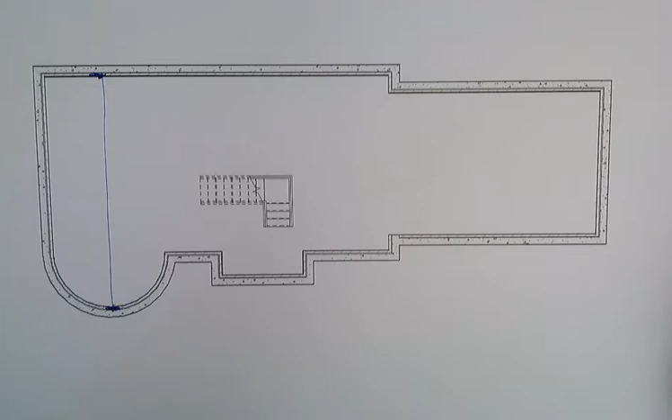So the longest point of our building, the longest span—and whenever we talk about how long a joist spans, we're really talking about the distance that it supports the floor without any support underneath it. Right now our span would be from that point to that point, which ends up being about 25 feet long.

We could find a joist that would span 25 feet, but the problem is you'd end up having a bouncy joist. That's a very long span to have in a residential situation. You'd have to have a very tall joist, probably ending up being 16 inches high, and you'd have to space it at 12 inches on center. You'd spend a lot of money on the floor.

So what we're going to do, more likely than not, is have a beam that will go down somewhere near the center of this joist. I'm going to draw the beam in red, and I'm not going to put the beam right through the stairs here—obviously I can't have a beam through the stairs.

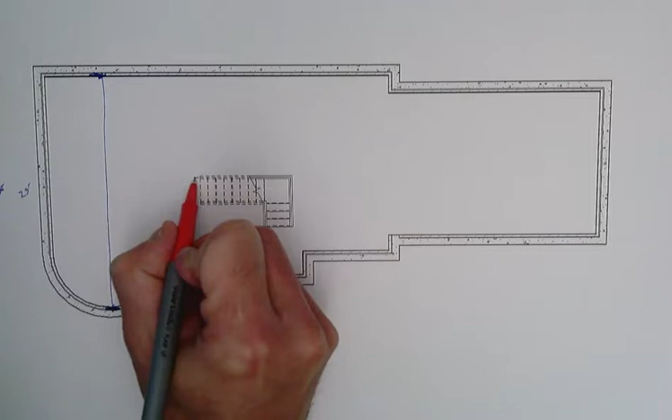I'm not going to put it on this side either, because then I'd have a beam right there. So what I'm going to do is line the beam up with the stairs and carry that through the whole way. Now I have a beam in place and I know where I can run my joists.

So my joists the whole way across are going to run this direction, and then down here they're going to run this direction. If this is 25 feet across, this distance is probably about 16, 17, 18 feet, but you could and actually should measure from this point to this point to find out how big of a joist you need and what the spacing will be.

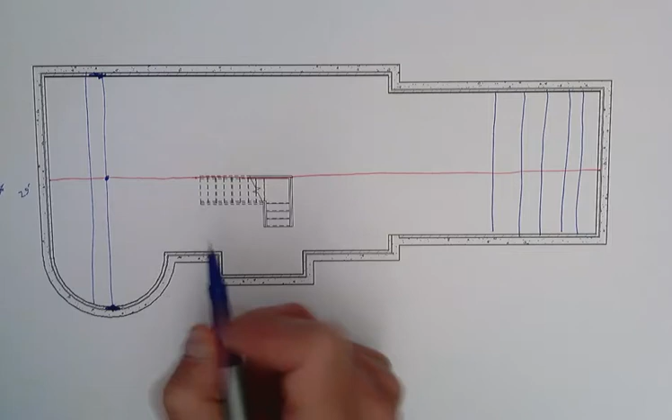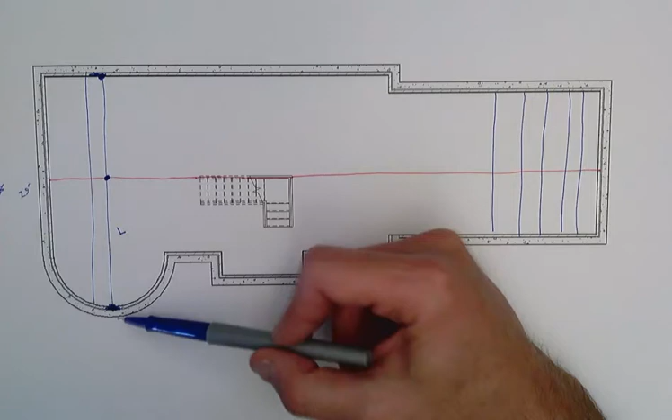After you do that, you can choose your joist. Keep in mind that now you have a support at this point, a support at this point, and a support at that point—I just created a new span. They always use the letter L to signify the span, and this is going to be a multi-span joist instead of a simple span joist.

So when we look at our joist selection printout, we can start narrowing it down to using a multiple span. The next thing I'd want to do is get my joist selection guide out and find a measurement. After measuring, we found that the new span—the distance the joist is unsupported—is 15 feet 7 inches.

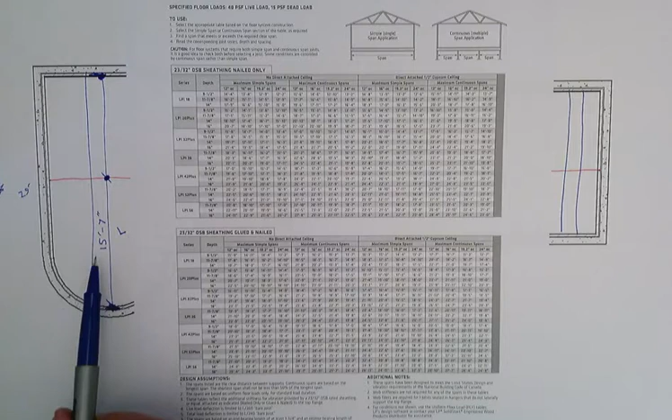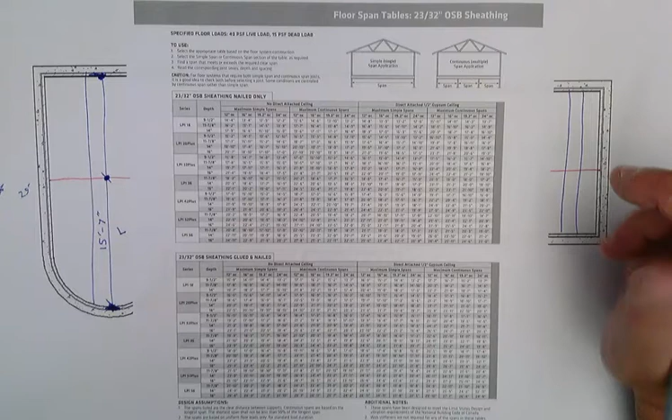So now we can go into our joist selection sheet. These are Louisiana Pacific wood I-joists, and there's quite a few to choose from, but the one we chose is for 23/32-inch OSB sheathing—that's how thick the subfloor is going to be. We also chose to use specified floor loads of 40 PSF live load and 10 PSF dead load, which are pretty substantial loads, so we're definitely good as far as picking out something that can handle any floor we put in there.

We could have a pool table in there, large bathtubs, things of that nature.

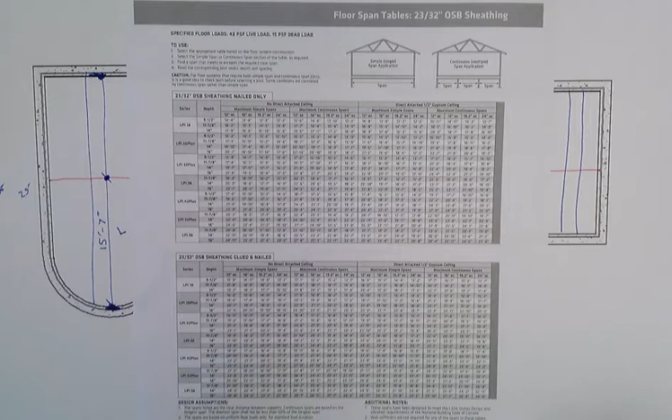So the first thing we want to do with this chart is figure out which option we're going to use. The first two options we have to look at are OSB sheathing nailed only, and OSB sheathing glued and nailed.

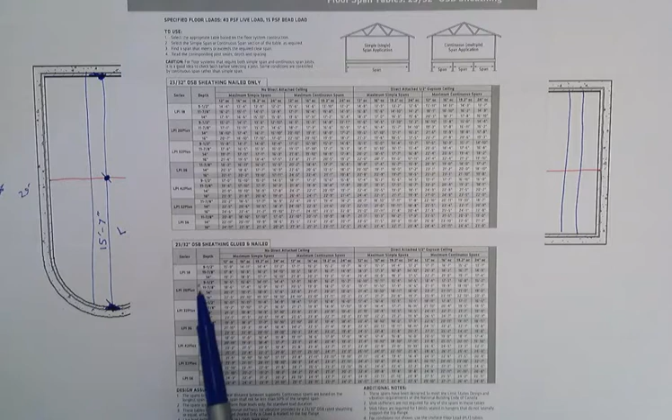The big difference between the two is obviously one is glued and one is nailed. Whenever we glue the subfloor to the joist, it becomes one solid sheet instead of a bunch of individual sheets. So we're going to go ahead and glue our flooring to the joist.

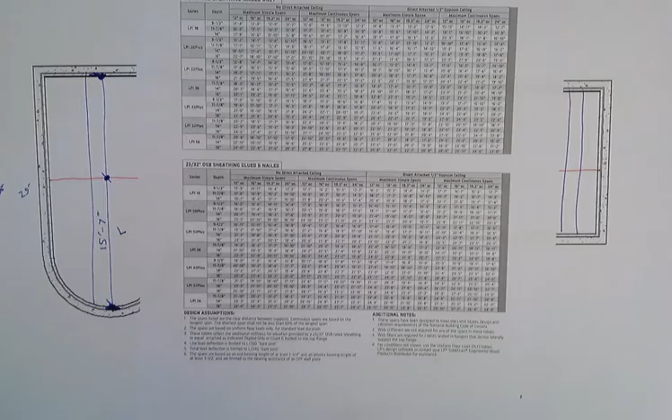Once we've narrowed it down to gluing, the next thing we have to decide is whether we're going to use no direct attach ceiling, or direct attach ceiling with 1/2 inch gypsum.

The big difference is, if I'm going to attach drywall directly to the underside of the joist, they only have the ability to deflect or bend a certain amount, because if they start bending too much, it's going to crack the drywall.

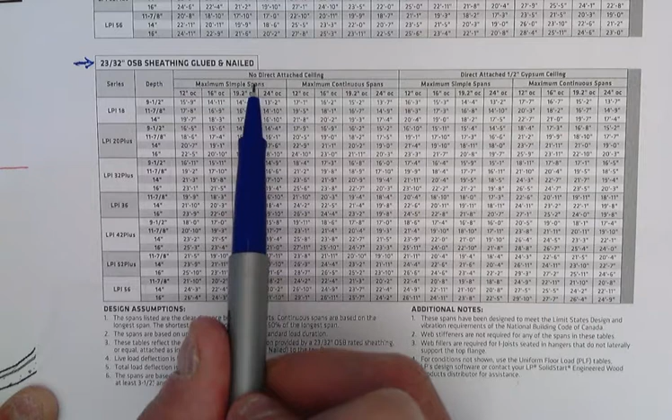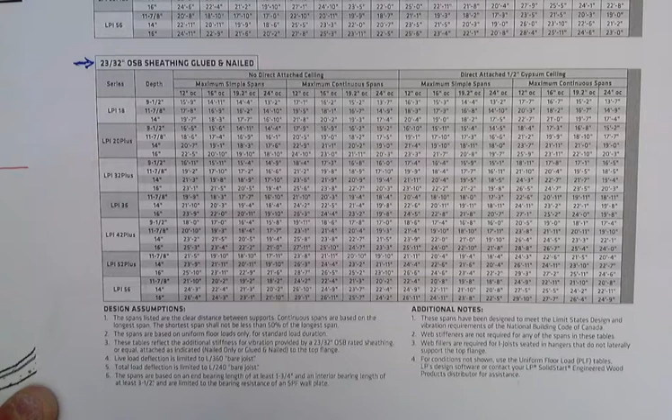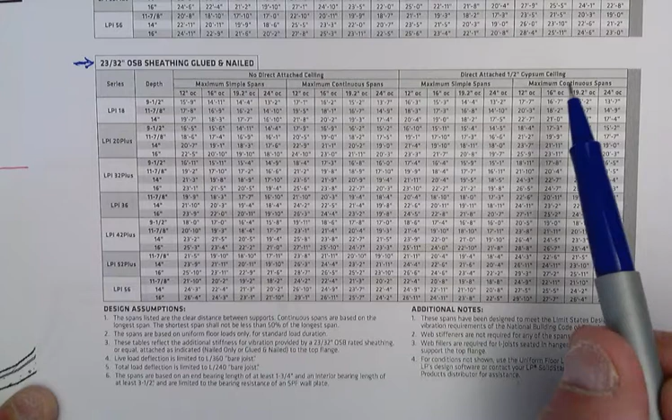In the other situation, the no direct attached ceiling, they're talking about a drop ceiling or an acoustical ceiling grid where the joists aren't connected directly to the ceiling. So we're going to use the worst case scenario and imagine that the people we're designing this for might want to put in a drywall ceiling in their basement. Now we can start looking at this chart.

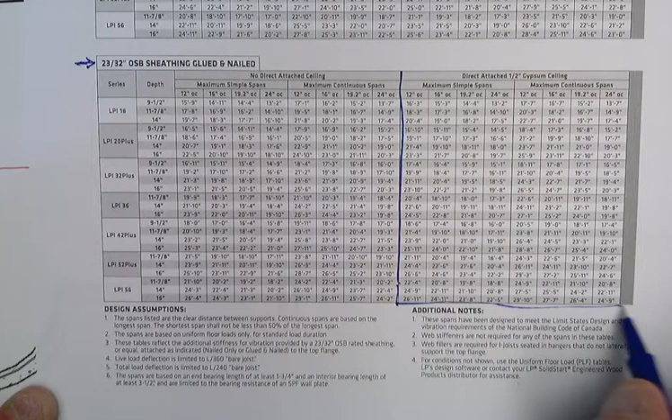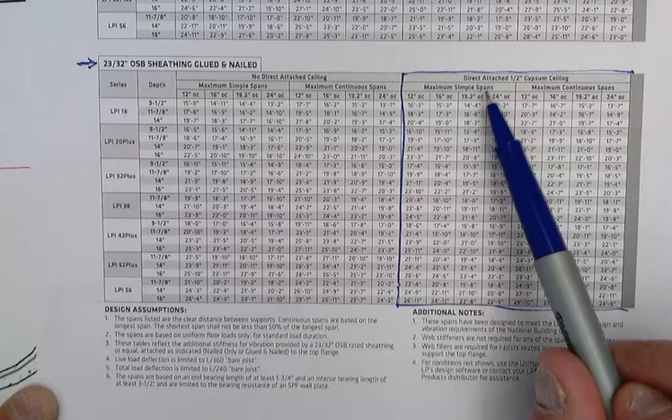So we're getting narrowed down, and the next thing we have to look at is maximum simple span or maximum continuous span. The difference is the continuous span has a support in the middle, while the simple span only has support at the ends.

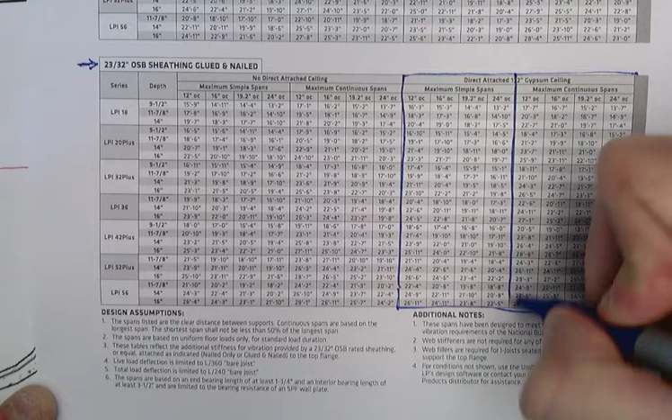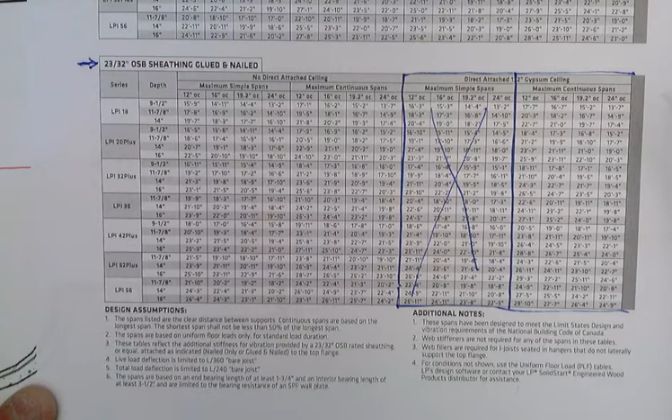So now we can look at the section on the right. The next thing we have to look at is our spacing. We have four different spacing options: 12 inches on center, 16, 19.2, and 24.

12 inches is going to make us spend a lot of money on joists—we'd have a lot of joists, and we could use that, but we're going to try to avoid it. 24 inches, in my opinion, is just spaced too far apart, so we're going to avoid that too. Now we are narrowed down to the multi-span category.

So the next thing we're going to do is narrow it down from multi-span. We're going to eliminate the 12-inch on center and the 24-inch on center, and look at the Joist Series. The series we're looking at right now is LPI 18.

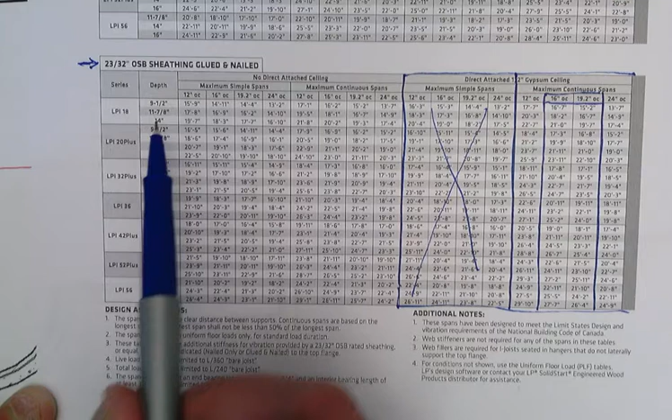Basically, as we go further down the list, the joists become more expensive. We started with an 11 7/8 inch high joist earlier in our project as a starting point, so we're going to look at that joist first. You could also go with a 14-inch or a 9.5 inch in that series.

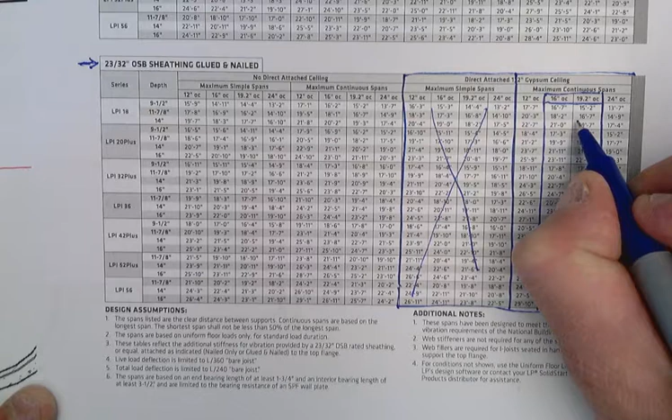So coming over to our category, the multi-span 16-inch or 19.2 inch, we can see the 19.2 inch can still span 16 feet 2 inches, which is quite a bit more than what we need, so we're going to end up choosing that joist.

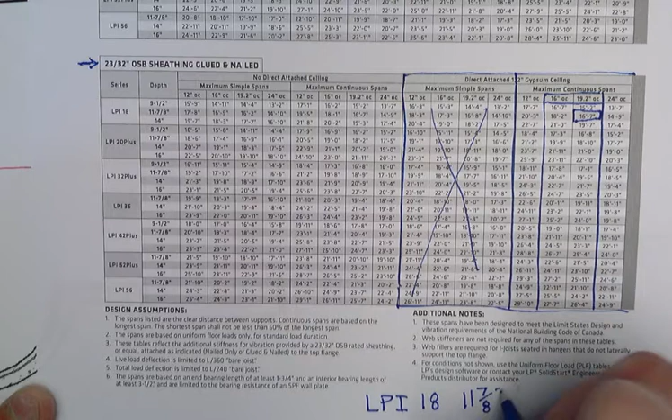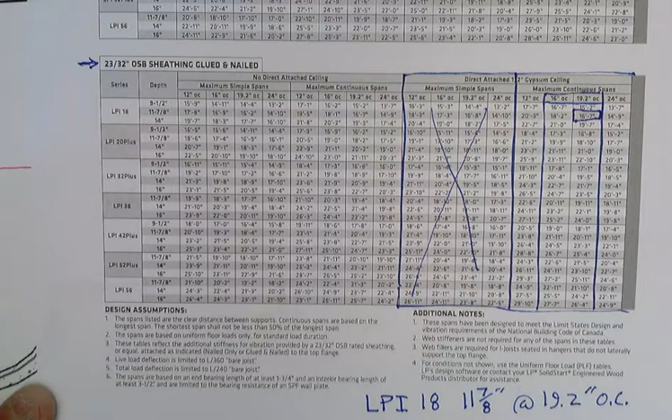So the actual joist we'd be choosing and specifying on the drawing would be an 11 7/8 inch LPI 18 spaced at 19.2 inches on center. We are not going to list the span on there because it's not important information for the contractor.

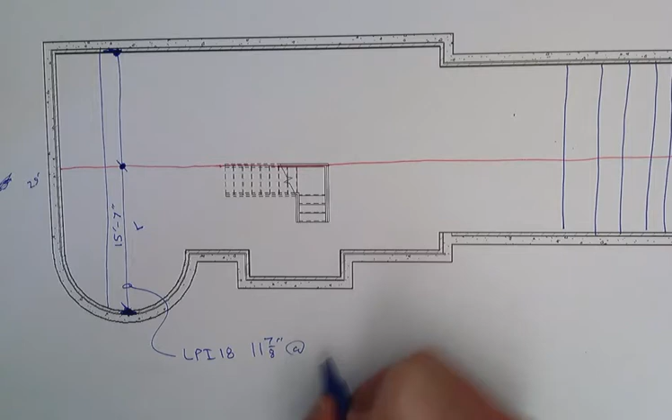So now that we have the span figured out and a joist selected, we can go through and add that to the drawing. You probably want to make note of that in your drawing as soon as you know it, so you have the information and don't have to look it up again. I'm just going to write it on this sketch for now.